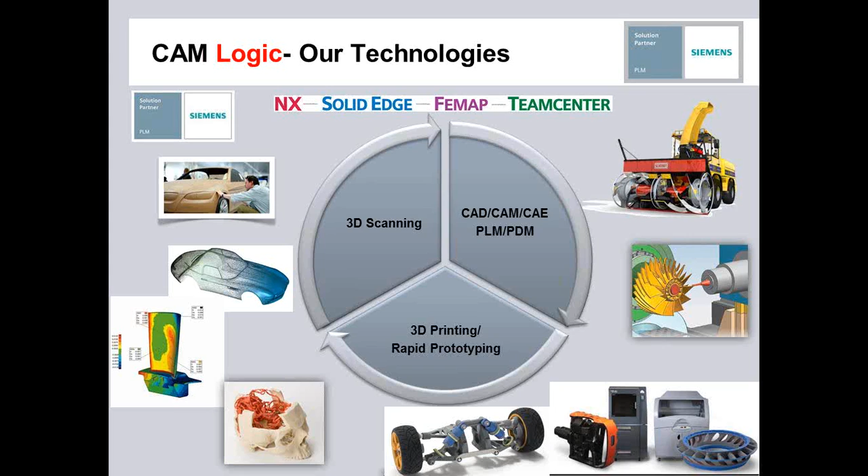So, now that you've heard a little bit about CAM Logic and a brief overview, let's see what's new in NX 8.5. Within the NX team, they took a look further at the challenges. And it was very clear to them that the challenges you face today have subtle differences if you're in the product engineering team or the manufacturing engineering team. So what we'd like to do today in this presentation is split those challenges into two. Let's first take a look at how those challenges affect the product engineering.

In today's presentation, I'll be discussing NX 8.5 enhancements in three areas. First, we'll take a look at the CAD side, which is your product design. Second, we'll take a look at CAE, which is simulation. And third, we'll take a look at CAM, which is manufacturing. So as I mentioned, let's start with product design.

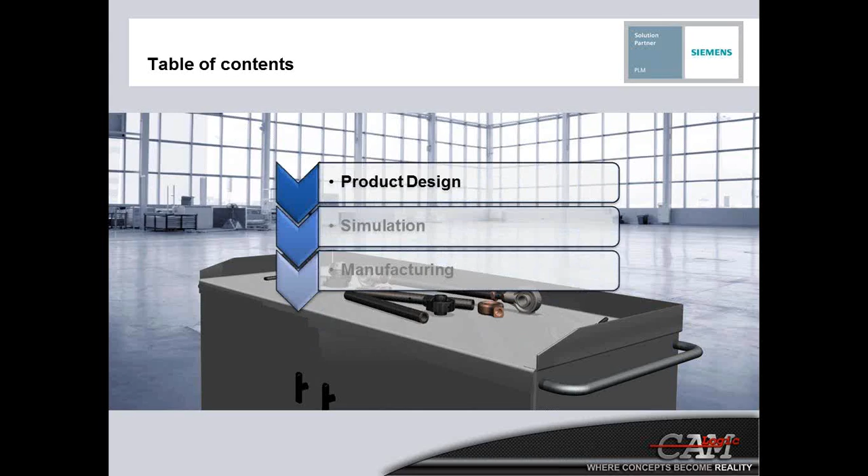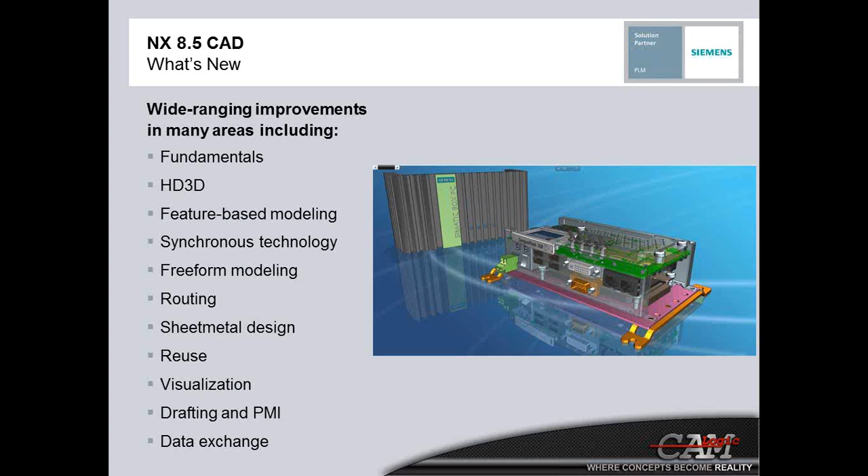So here, what's new in 8.5 CAD? There are wide-ranging improvements in many areas. These areas include fundamentals, HD3D, feature-based modeling, freeform modeling, synchronous technology, routing, sheet metal design, reuse, visualization, drafting and PMI, and data exchange.

Fundamentals and sketching. Customizable radial menus. It's now possible to customize the radial pop-up menus. Interestingly enough, this was the number one enhancement request from customers. Less and more dialog box versions. The NX 8.5 user interface provides you with as many or few options as you need with the new less and more dialog box versions, which are based on the role you are using. If you need fewer options, you get the simplicity of a less dialog. And if you need the versatility and options of the full dialog, you get the more options.

See-through preview. This see-through preview highlights the feature being created or modified by de-emphasizing other geometry in several customizable ways, such as making them more translucent, changing their color, or applying edge effects to them. New measurement options make it easier to investigate a model and determine clearances between objects or sets of objects. The new Simple Measure Favorites drop-down allows you to make quick, non-associative measurements with very simple commands and dialogs. You'll also see enhancements within sketching: Sketch CSYS, Sketch Constraints, Sketch Dimension Creation, and Sketch Rectangle Constraints.

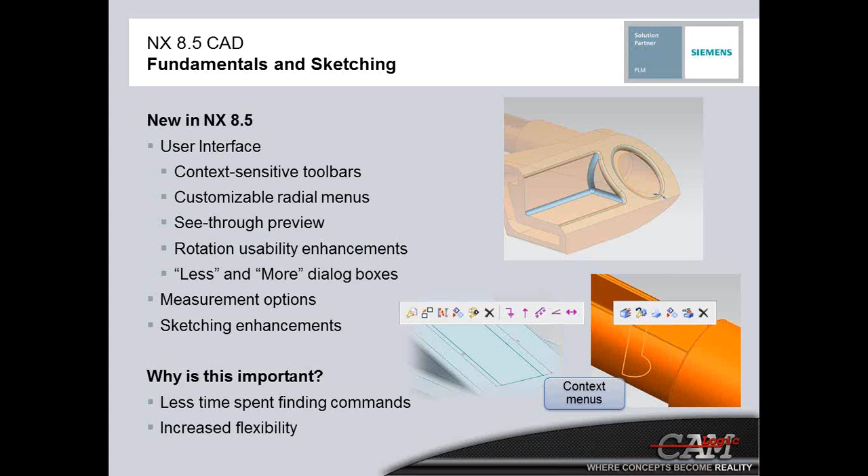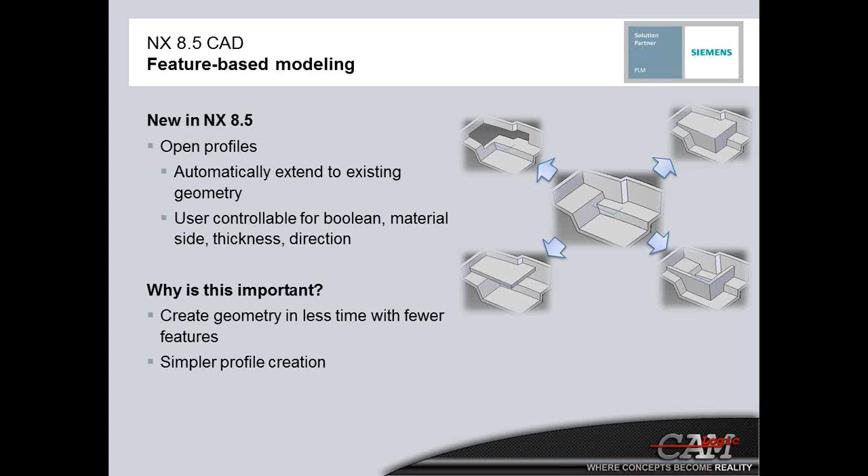Feature-based modeling. You can automatically close the profile to surrounding model geometry. The value here is to simplify the process of defining profiles, and it also simplifies the process of creating ribs by automatically extending the profile. In addition, Emboss Body is a new command that allows you to create intersections or unions between two solid or sheet bodies. This is useful for creating dies or ensuring sufficient clearance between two parts.

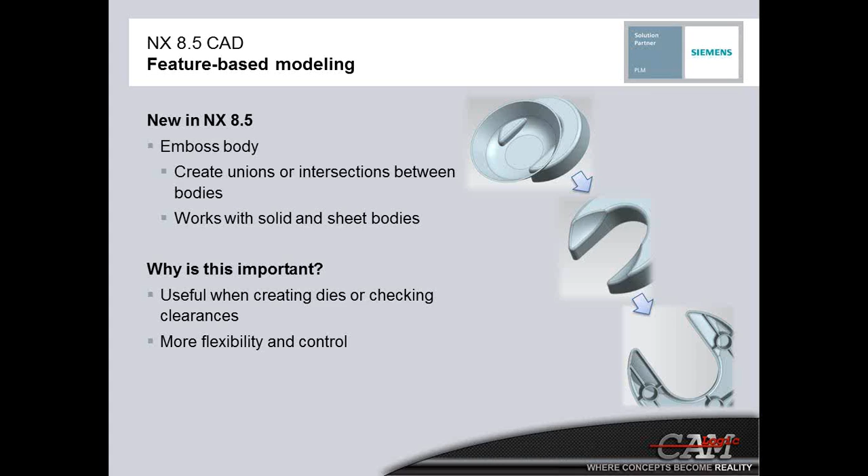Let's take a look at draft to surface. You can now add draft to a model using an intersecting surface, including non-planar surfaces, as the parting line. This draft can be one or two-sided. While this has been possible in the past, with this new functionality it's significantly faster and more efficient, with 40% fewer features and only a third as many commands as the old method.

Users can now add draft to a model where the parting line is defined by an intersecting surface. Prior to NX 8.5, a user would have to create additional geometry before he could add draft to the model, which would have to be selected for each draft face created, which in turn would increase as the models became more complex. New selection rules make it easier to select the geometry you need when creating draft features and edge blends. For the helix enhancements, creating helical shapes such as springs or threads is easier and more powerful thanks to new commands which allow you to vary pitch and size, control limits with on-screen handles, and define your helix along a 3D curve.

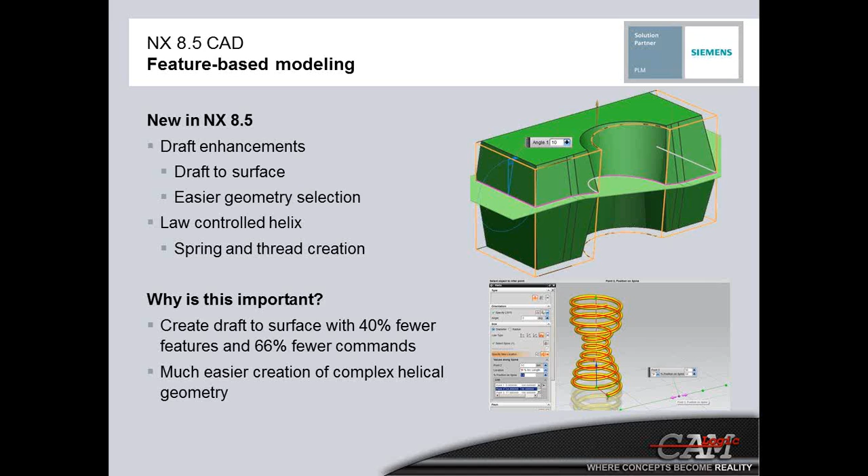Synchronous modeling, improved problem area detection. Synchronous technology can now alert you when the changes you are attempting will cause potential errors so that you can adapt accordingly. In synchronous modeling, there is now improved recognition of problem area conditions that are likely to result in potential errors when moving or deleting faces. The alert message now provides improved clues to identify the error condition and offer potential solutions.

For example, the faces on the center boss feature are to be deleted using the delete face command. An alert message informs you that the remaining faces cannot adapt to close the area left by deleting the selected faces. Some possible solutions are given, such as using the cap option or deleting the blends first. This is a big time savings.

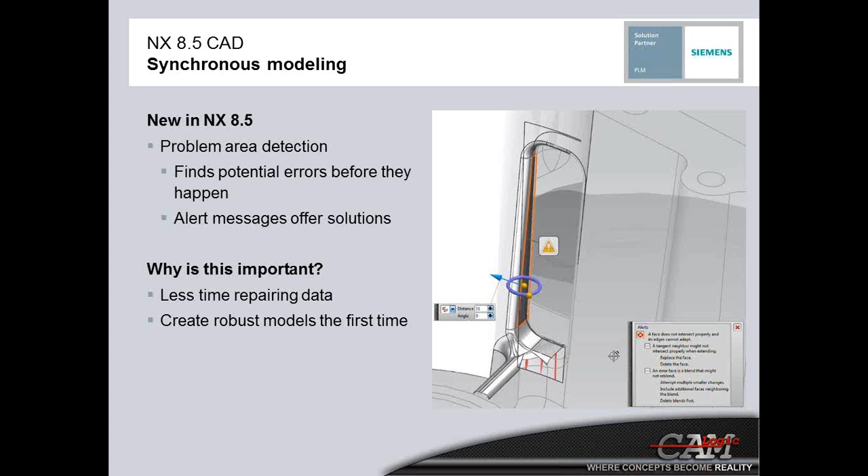New options in the delete face command allow you to easily select blend surfaces for deletion. You also have more options under the heal setting to get the geometry you want after deleting the face.

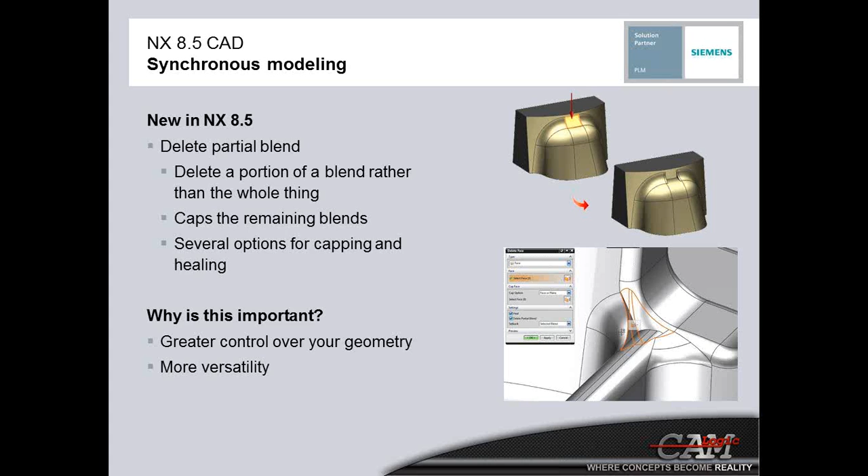A new feature in synchronous modeling, label notch blend. This new feature allows you to label faces as blends, adding intelligence to history-free data and making it easier to get the results you want when you use synchronous technology to modify the geometry. You also have the new step face and move behavior options, which give you greater control of your geometry as you move a face to modify it, meaning you are more likely to get the results you want the first time.

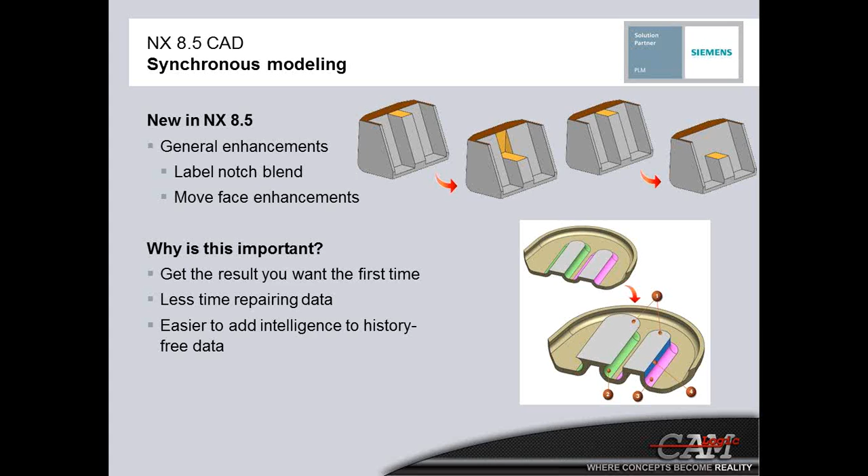Here you'll see with Freeform Modeling, you can enhance the visual display of your curved geometry by highlighting endpoints in several different ways. New surface analysis tools such as isoclines and reflection contours help you ensure that your surfaces meet all the necessary requirements.

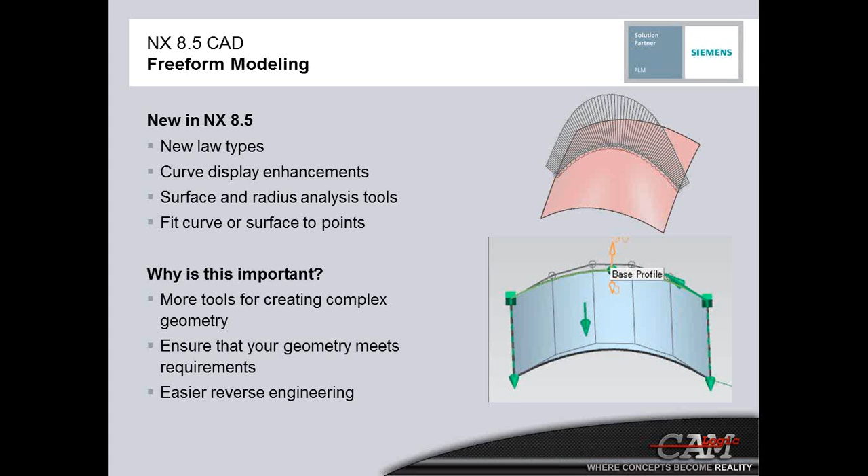The new Mirror Assemblies command in NX Routing allows you to mirror routing objects to create symmetric routing networks, saving time and ensuring consistency. The Run Navigator command is now more powerful and versatile thanks to the ability to create runs, search runs by attributes, assign paths, activate and deactivate runs, and control the flow direction.

The Unify Path command can now identify parts by their specifications, making it easier to find and replace components with the same specification. This is going to save time and ensures that requirements are met. And the Handrail Creator. The new Handrail Creator command allows you to easily build handrails for platforms using a few simple parameters in the reuse library.

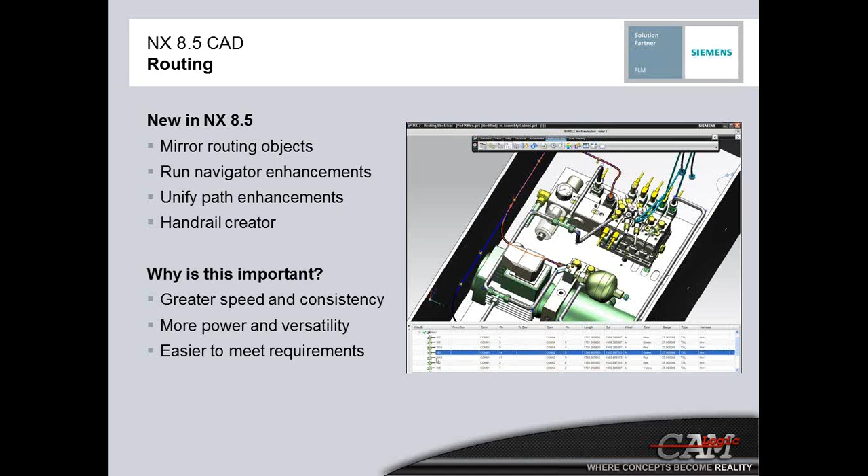Looking at sheet metal. Flange enhancement. It is now possible to create a flange on the linear edge of a deformed face formed by a dimple feature. You can then unbend or rebend the flange or create flat solid or flat pattern features. It's one more tool to help you create the shapes you need in sheet metal.

NX's pattern feature functionality has been extended to NX Sheet Metal in 8.5. You can now pattern any punch type feature, edge preparation features like break corner and chamfer, and flanges, tabs and normal cutout features. Patterning saves a great deal of time when creating multiple similar features.

You're going to see a Convert to Sheet Metal wizard. You can use the new Convert to Sheet Metal wizard to convert a solid model into an NX sheet metal part. The wizard has many options for cleanup and conversions, such as edge rip, thickness, tolerance, bend relief parameters, and many, many more. This enables you to quickly generate a robust, reusable sheet metal part from a standard solid model.

It's now possible to convert geometric conditions such as gussets, ribs, beads, dimples, and drawn cutouts when converting a solid model to sheet metal. In addition, the cleanup utility is able to infer the thickness of the new part, recognize B-spline faces in the model and convert them to a simpler form, and convert sharp edges to bend regions.

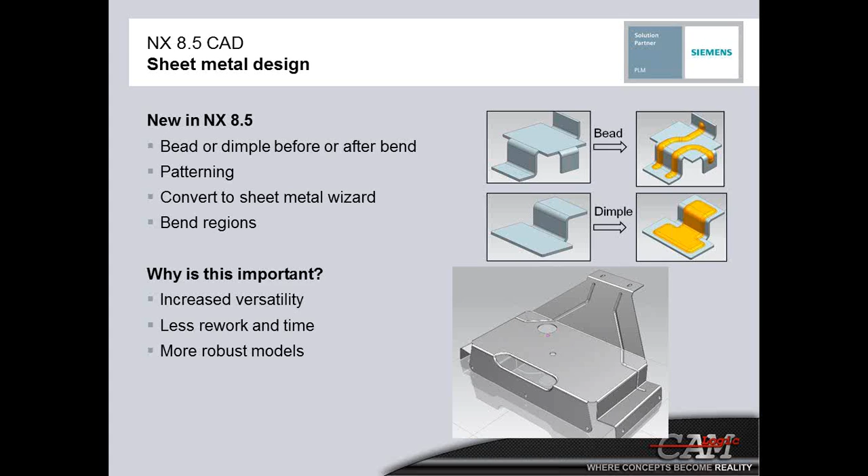Looking at reuse, adding deformable components from the reuse library. You now have the option of changing deformable parameters on a part when you drag it from the reuse library. This makes placing your deformable parts quicker and much easier.

Add reusable components preview window. When you add a component from the reuse library to an assembly, you have the option of viewing the component in a preview window where you can pan, zoom, and rotate it to verify that it does meet the needs before you actually place it.

NX 8.5 gives you the option to add multiple occurrences of a reuse library component at the same time. This is especially useful for standard parts that are used in many places at once, for example, maybe fasteners.

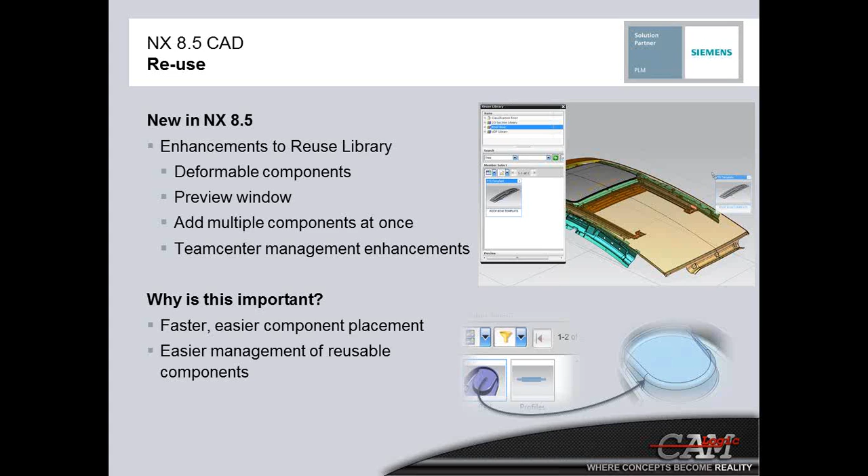The new 3D dome scene background in the True Studio environment maps a panoramic image into a hemispherical dome. And what this means is that you can pan around your model. It appears to be in a realistic environment from any angle, which improves the quality of visualization.

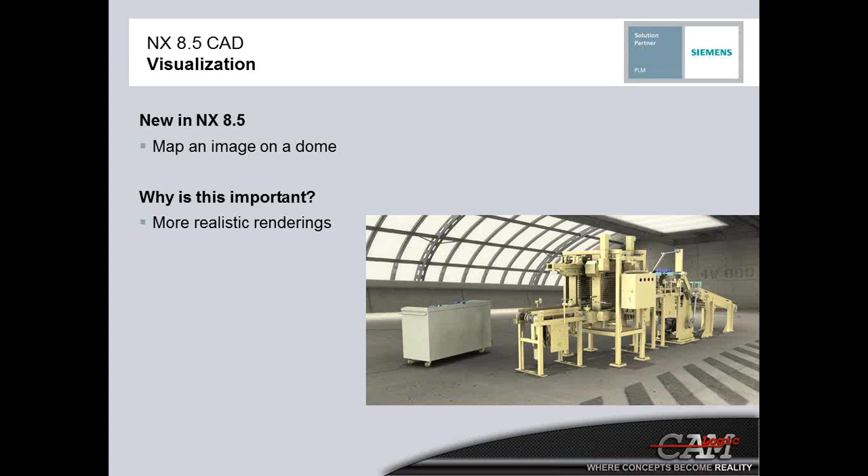Moving into drafting. Here you see lightweight view. With lightweight view, you now have the option of creating lightweight drawing views. These views, which consist of JT faceted representations of model geometry, can be used for all drawing views, and it will reduce system resource usage, especially with drawings of large assemblies.

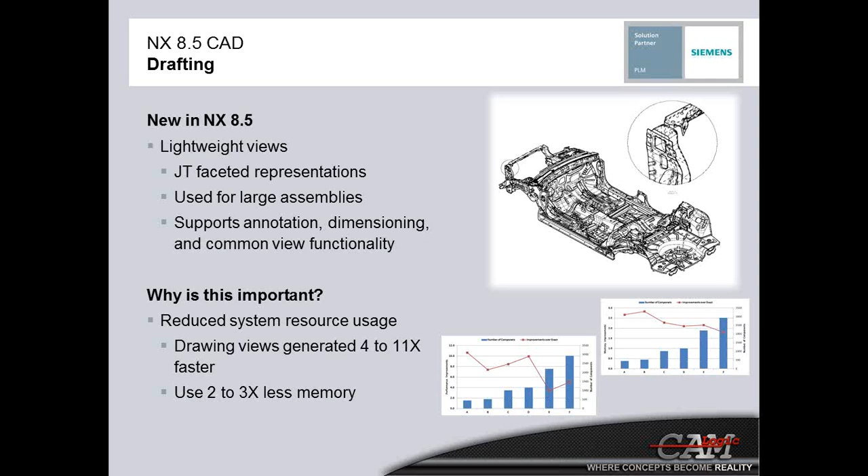Here in drafting, View Creation Wizard enhancements. The View Creation Wizard has been enhanced with new commands and options designed to optimize performance with large assembly drawings, such as the option to use lightweight views and showing a different set of view creation options if the assembly exceeds a user-definable number of components.

You have associative view alignment. A new option gives you the ability to permanently align a view with other views when you are placing or editing it. This alignment will be enforced even if the views change or move, giving you greater control over your drawing views. You'll also see weld symbol enhancements.

You now have more control over weld symbols, including the ability to change the weld standard without having to reset the whole drafting standard in your NX session. The new weld symbol size factor function lets you control the size of your weld symbols more easily in NX drafting or NX PMI.

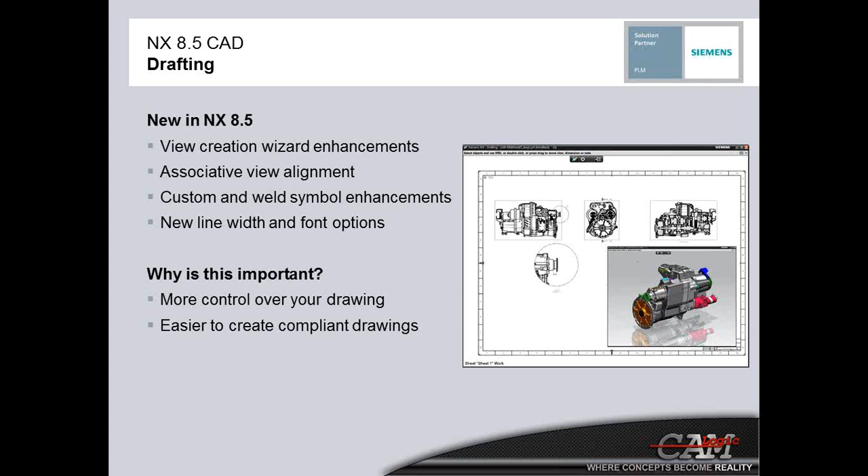Moving on with PMI, Product and Manufacturing Information. Here we're going to take a look at the PMI user interface enhancements. The PMI user interface has been simplified, and some commands have been renamed and moved to make them more intuitive to use. You can now use PMI assembly filters to exercise greater control over which PMI is displayed in which places, helping to clean up and manage your PMI.

When trying to find the PMI associated with selected geometry, you now have the choice of viewing it in a permanent, or you can view it in a temporary file. When extracting geometry from a body, you now have the option of extracting PMI data along with it, reducing rework, and helping you create smarter models.

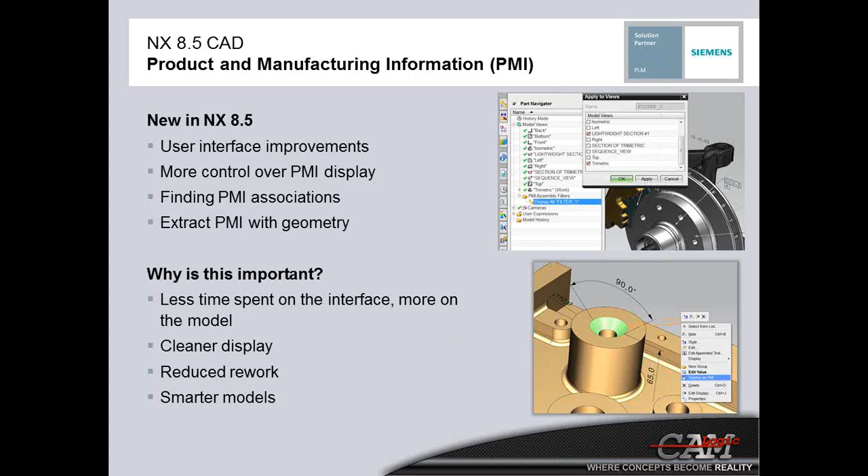With the data exchange, you have a DXF DWG export wizard. It's easier than ever to export data to DXF or DWG format with a new wizard for this task. It streamlines the process, gives greater control over export options such as 2D, 3D, and CGM, and it provides an improved user interface. The wizard now supports true type fonts and also international text as well.

The JT translator. With this improved JT export interface, it's easier to control how your information is exported, and you can now save your configurations to a file so that you can use it later. There are more export options, including tessellation settings, line width, and others.

In addition, the JT export now supports PMI weld labels, direction vectors and display planes, the ability to write attributes as strings, and the ability to write NX reference sets to a single JT file or as JT layer filters. When reading JT files, NX now translates the attributes of JT nodes onto the NX part, which makes it easier to understand the imported data.

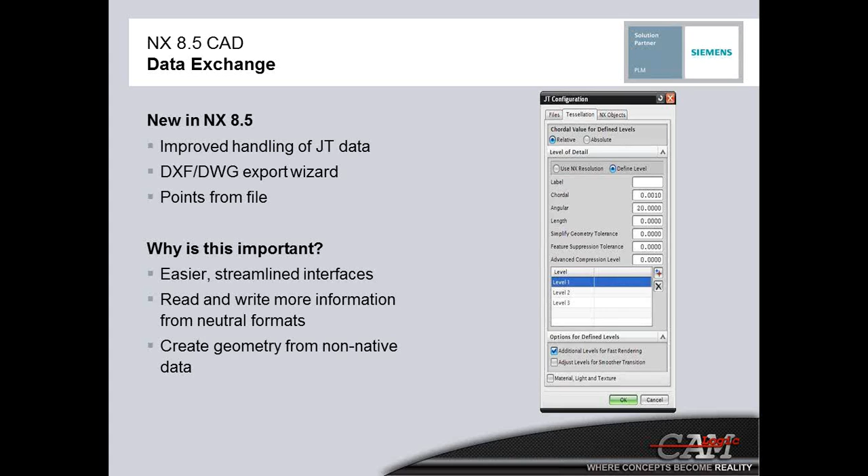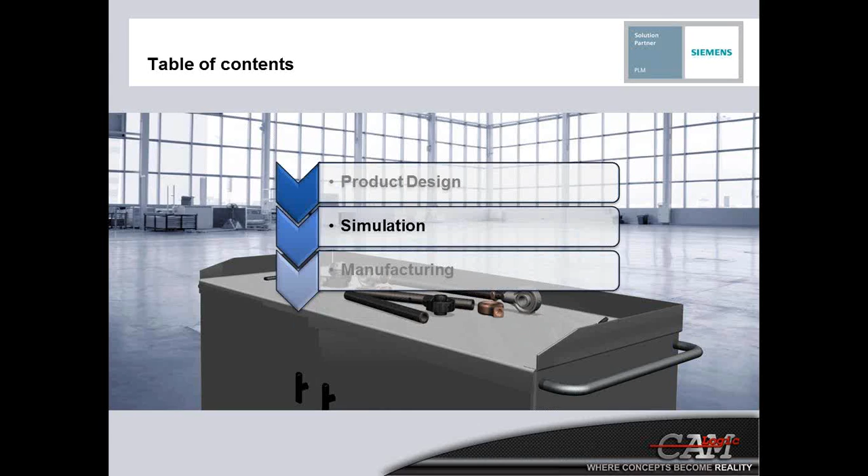Okay, moving on from product design. Let's move into CAE simulation here. So what's new? You'll find new simulation and productivity enhancements in simulation modeling, engineering optimization, structural analysis, thermal and flow analysis, multi-physics, and motion analysis.

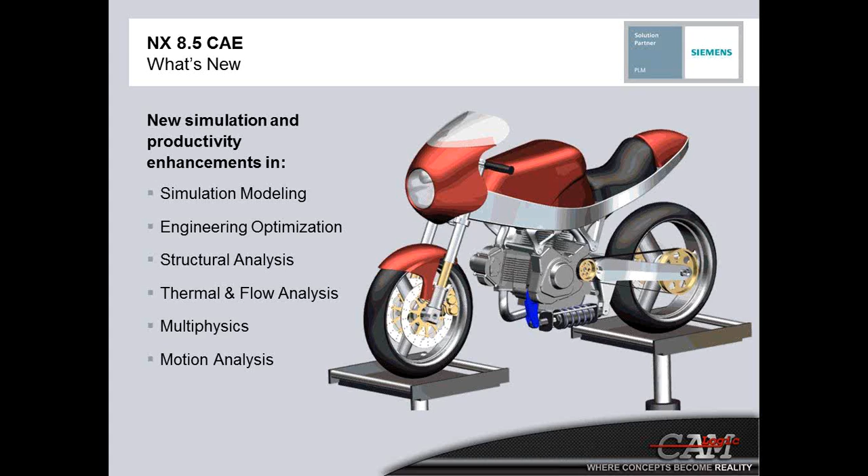Again, in simulation modeling, you're going to see the DXF DWG export wizard. Again, it's easier than ever to export data to DXF or DWG format with the new wizard for this task. It's going to streamline the process, give greater control, and provide an improved user interface. Also the JT translator, improved JT export interface, easier to control how your information is exported, and you can save your configuration to a file to use it later.

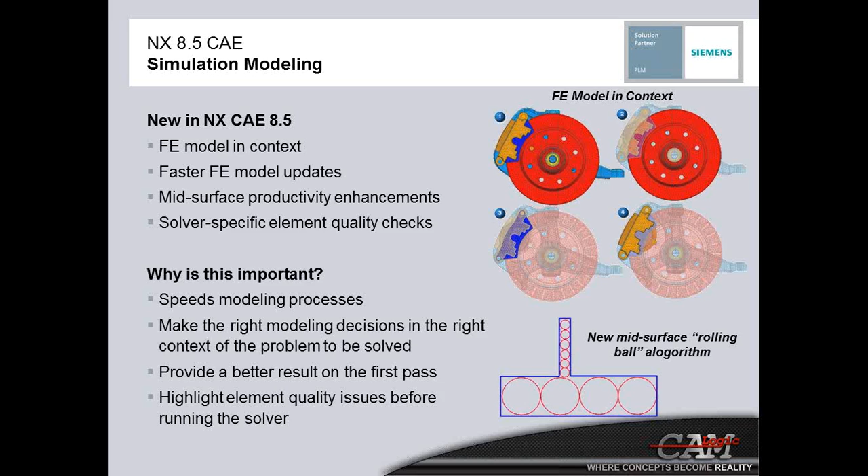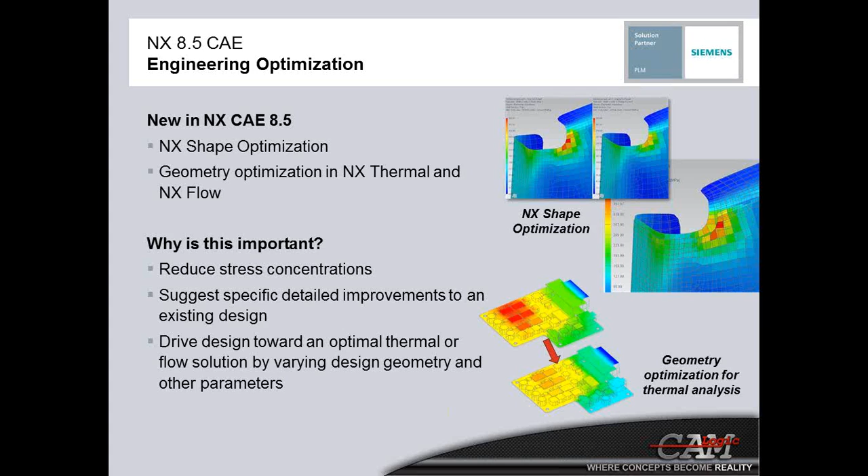Again, the same here with engineering optimization. You've got NX shape optimization, geometry optimization in NX thermal and NX flow. With this, you're going to have the DXF DWG export wizard, the JT translator, points from file. Structural analysis. You're going to have edge-to-edge glue and contact support for NX Nastran. Bolt preloads on solid elements for NX Nastran. And again, you have the DXF DWG export wizard, the JT translator, and the points from file.

So, thus far, we've seen product design and simulation. Now we're going to move into manufacturing. NX 8.5 boosts part manufacturing productivity in the machinery, turbomachinery, aerospace, medical, and mold and die industries. You save time programming and machining parts with new machining operations, more tool path control, and easier ways to automate programming. Close the quality loop by creating CMM inspection programs and analyzing results all directly within NX.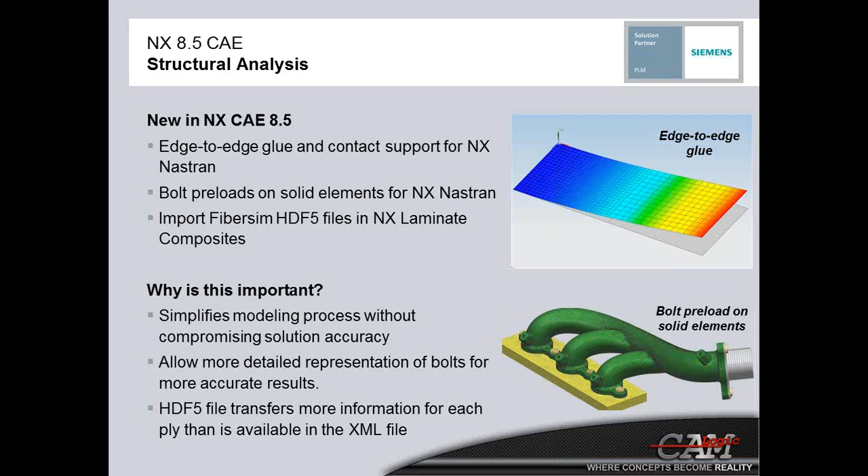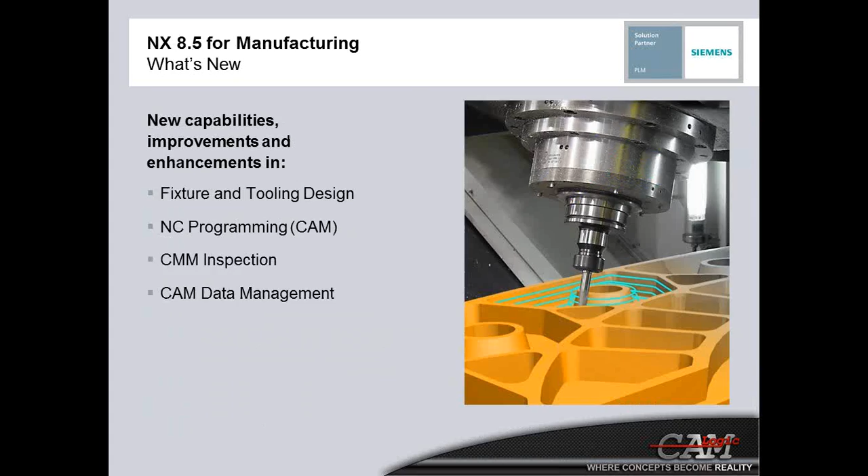From NC programming through to machining, save on tooling costs, and use the right data with new tool library and CAM data management capabilities. Once again, the NX team took a look and also looked further at these challenges and found that the challenges you're facing today have subtle differences whether you're in the product engineering team or the manufacturing engineering team. So what I want to do here is split those challenges into two. Let's first look at how those challenges affect the product engineering area.

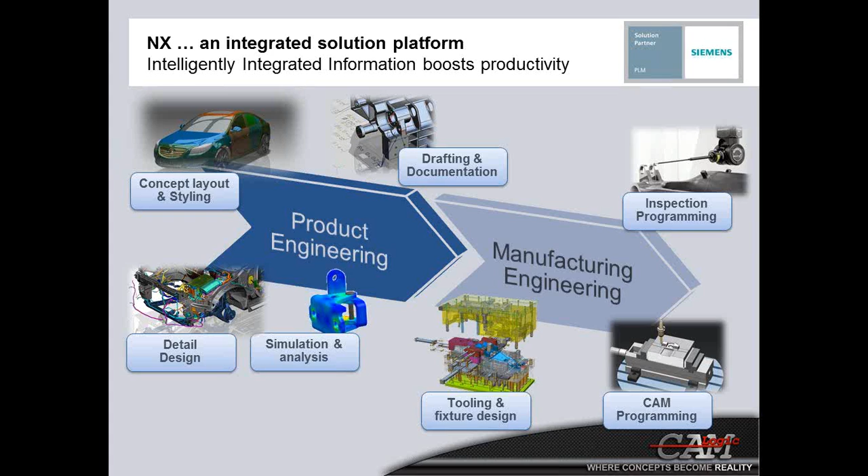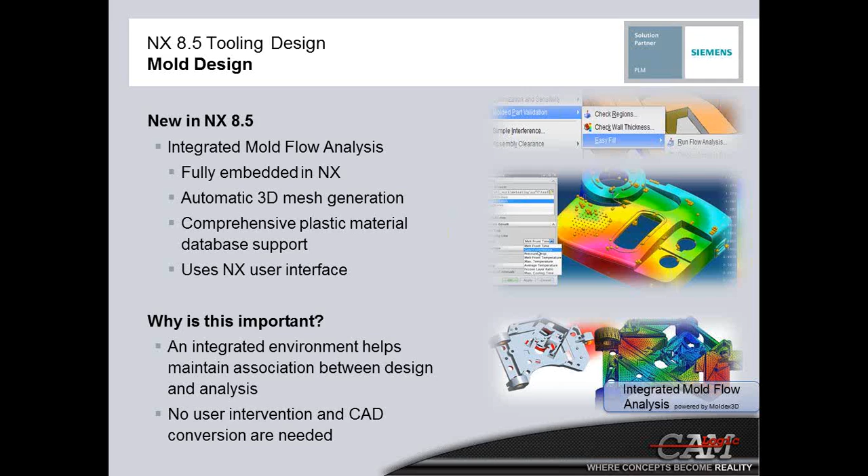Here we'll start with mold design. Now, CoreTech System is the provider of world-leading CAE products for the plastics injection molding industry, and the flagship product is called Moldex 3D. And Moldex 3D consists of three modules such as eXplorer, eDesign, and eSolid. The integrated product name is NX Easy Fill Analysis, which uses the eXplorer technology from Moldex 3D. The seamless integration leads the way to optimizations for not only part designs, but also manufacturing process parameters very early in the development process in NX without having to switch between CAD and CAE software.

Moving forward with mold design, these new enhancements are very important, improving the overall mold design process through elimination of many manual modeling methods. Upfront part design validation for manufacturability and moldability in an integrated NX environment speeds up the decision-making process. And what you will see is parting surface automation, cooling channel design usability, reuse of standard parts, electrode design, and drawing automation.

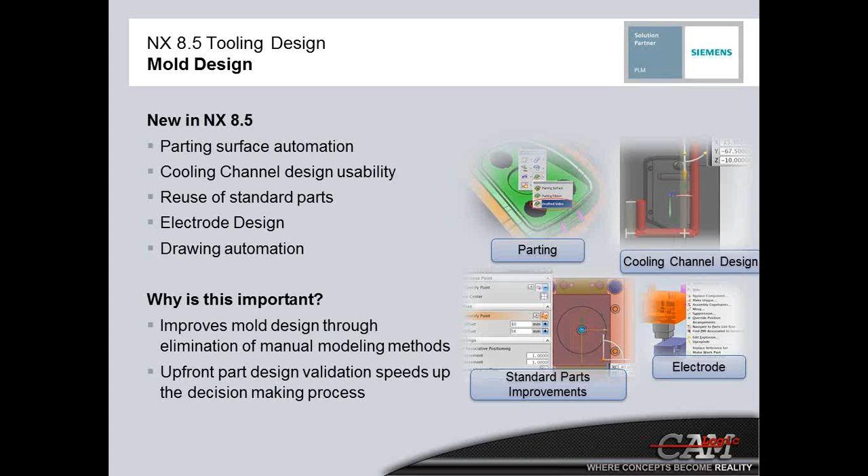Looking at progressive die design, you're going to find intermediate stage design, which provides a preview during the intermediate stage creation. Direct unfolding, you have support for non-uniform thickness parts for unforming, EDW process design support, and drawing automation, which gives you an improved template-based approach for drawing creation.

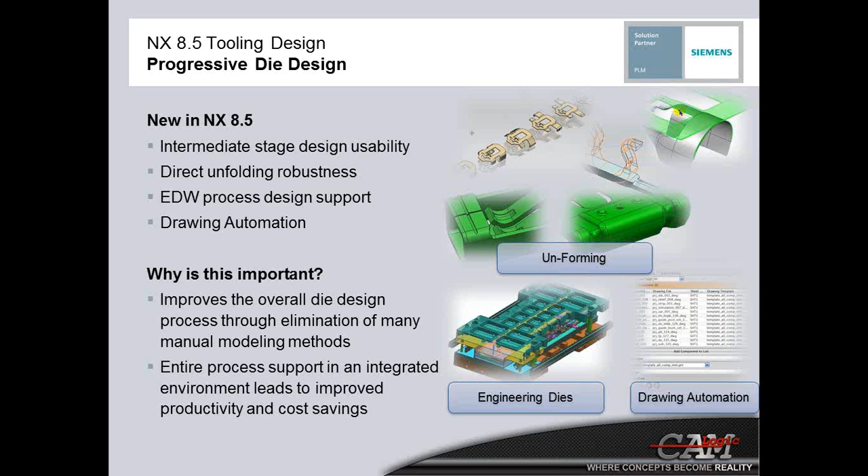NX CAM for industrial machinery and heavy equipment parts. Volume-based 2.5D milling provides a very fast and intuitive method of programming prismatic parts. You simply select faces such as walls and floors on the 3D part model to define the machined volumes. An instant visual preview gives you fast and easy validation of the planned machining operation. Programming can be 5 to 10 times faster with this.

The system continuously keeps track of uncut metal and minimizes air cutting, reducing machining time up to 10%. Multi-stage machining processes also track the in-process work for greater efficiency. Advances in feature-based machining automate the sorting of machining operations across multiple setups for faster, easier programming.

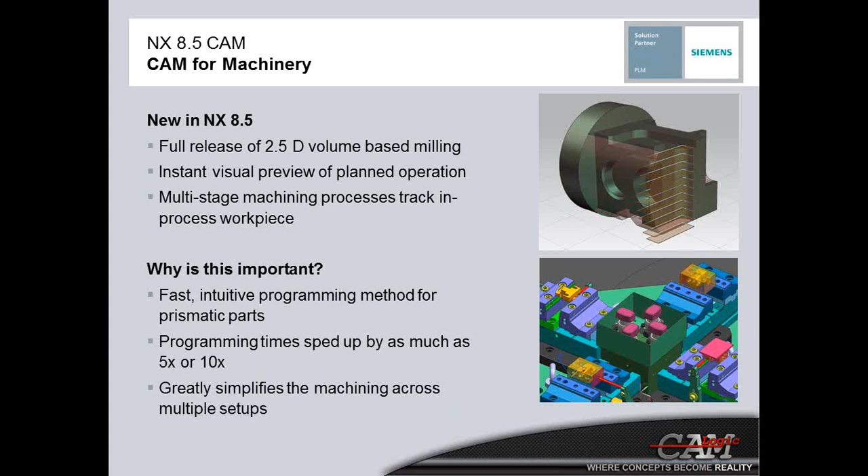NX CAM 8.5 within Turbomachinery Milling has new options for roughing operations to improve machining efficiency for turbines and multi-bladed parts. And by adding depth to the slotting motion, you can assign higher feed rates or deeper depth to roughing operations. Additional operations for finishing blades facilitate rough finish iterations to finish thin blades more accurately and with a better surface finish.

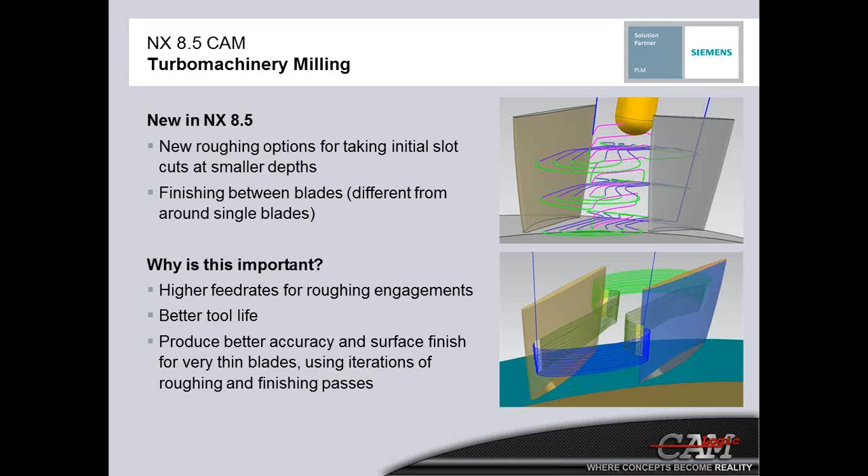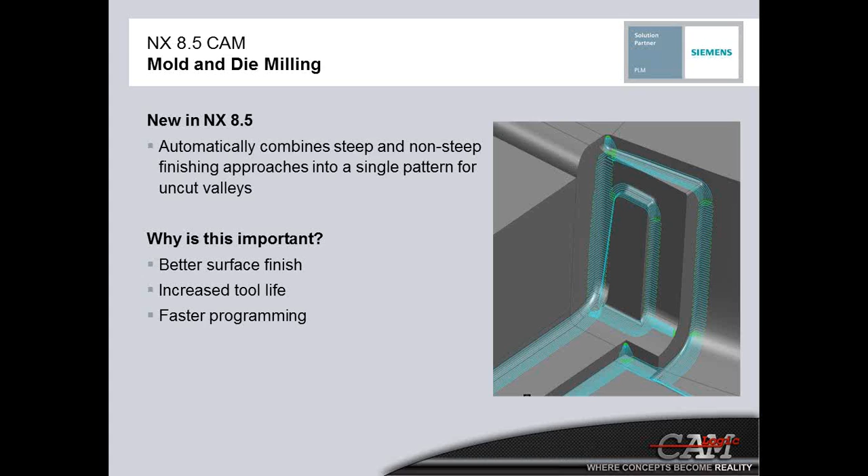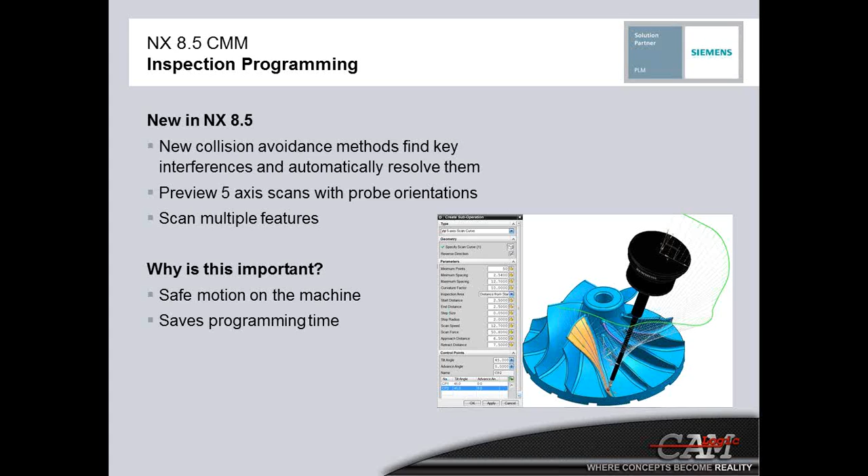NX CMM 8.5 also provides time-saving features, such as new collision avoidance methods that find key interferences and automatically resolve them. You can preview 5-axis scans with probe orientations to make sure the desired results are achieved, and more complex scans can span multiple features.

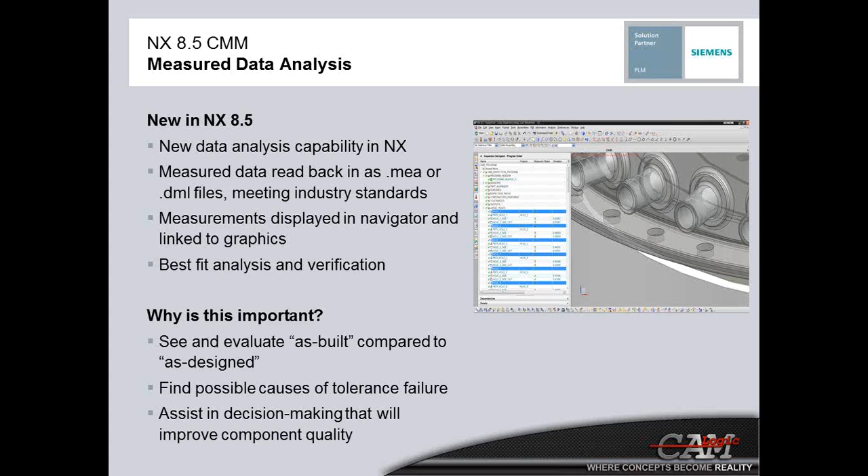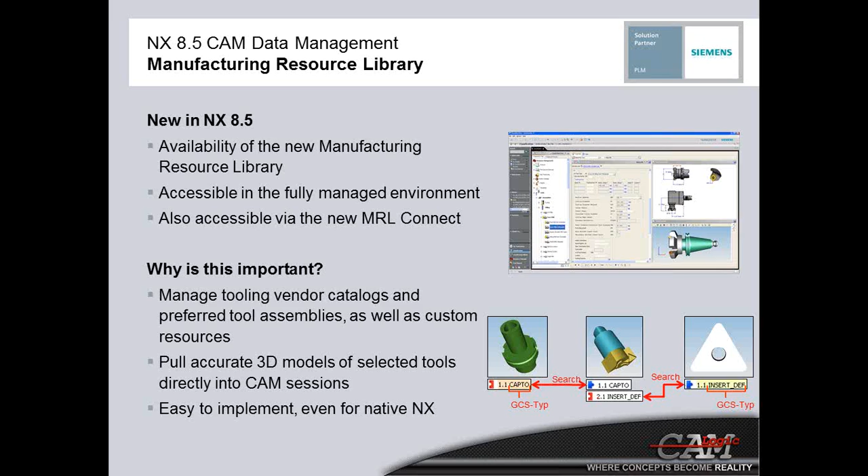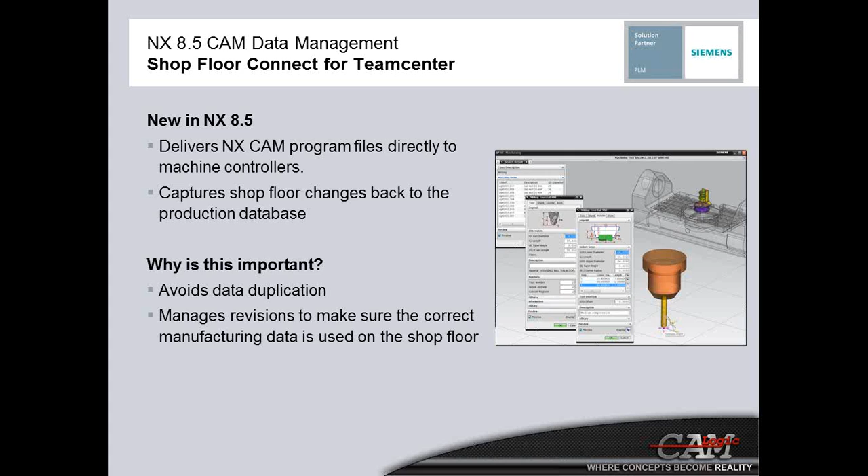So, this concludes the What's New in NX 8.5.